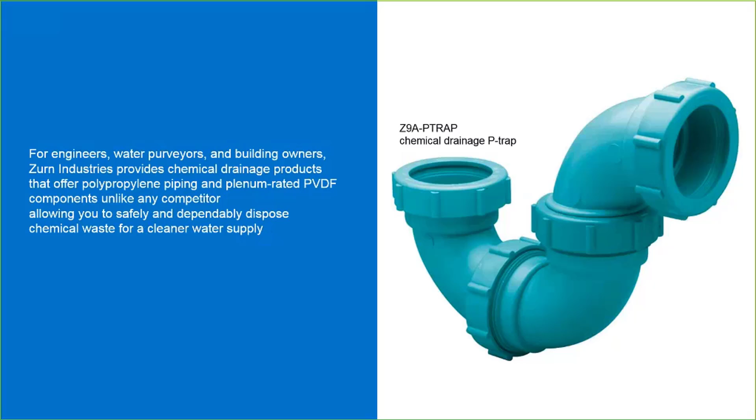For our engineers and building owners, Zurn does provide a chemical drainage product offering of both polypropylene and PVDF for pipe and fittings. Unlike our competitors, however, we have one fitting for two different mechanical joining systems and one fusion system, so a combination fitting that helps reduce inventory carrying levels and also allows for additional job site flexibility, providing reliable leak-free joints for the purpose of disposing of chemical waste and keeping the water supply safe.

If we look at the voice of the customers for the industries we serve, the owner needs a dependable, durable, low cost of ownership, lower cost to install and maintain for the life of the building that reduces downtime and is easy to maintain. The engineer needs a dependable product that meets codes and compliance issues and is also durable, lasts the life of the building, and also provides a cost-effective solution.

Whereas the contractor is going to look for something that's easy to install, easy to maintain, assembled, received on site in an easy fashion, and saves them labor and handling on the job site.

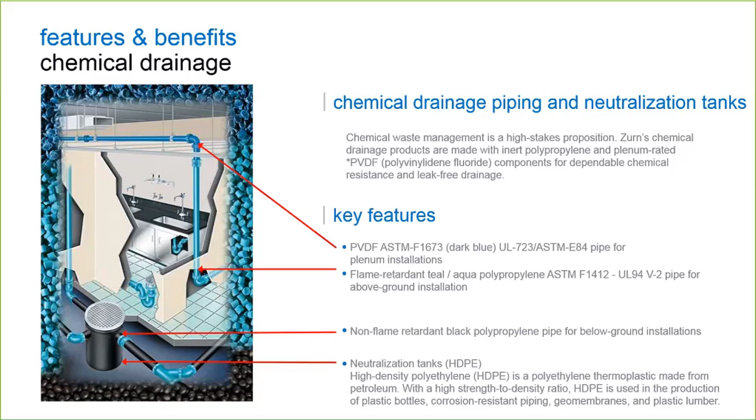The tanks are constructed of HDPE, which is high-density polyethylene, also a thermoplastic in the polyolefin family, and very similar in chemical resistance to polypropylene. Most tanks, barrels, containers are made out of HDPE. Important note there is that you cannot fuse or bond to that by heat. That is a mechanical joint only.

Again, when you're looking at the pipe options, we offer 3. Your non-flame or black, which is in your ground, shown in the middle section there, can be 10-foot or 20-foot lengths. We stock both of those, and the idea with the 20-foot length is that it will reduce a coupling and therefore labor and get you to those longer runs that are typically featured under the ground. That is 1.5 through 6-inch sizes.

The flame retardant polypropylene, 1.5 through 6-inch in diameter, comes standard in 10-foot lengths. And then the PVDF is 1.5 through 4-inch. Most of that is above ground in plenums, and 4-inch is more than ample size to accommodate that requirement. And those are also 10-foot lengths.

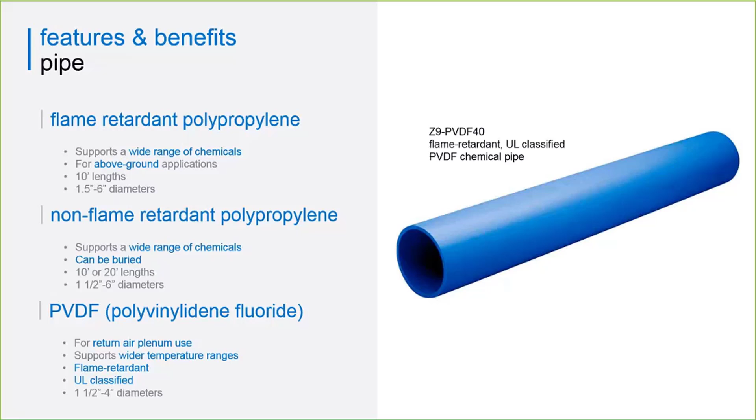So that PVDF pipe does carry a UL 723 E84 flame and smoke resistant rating, whereas the flame retardant is rated to UL 94 V2, and of course the black or non-flame retardant is not rated, which is for use underground.

Let's talk about the joining methods now. The value add that Zurn offers is one fitting can be used for any of the three joining systems shown here. So whether it's the traditional grooved mechanical connection, the labor-saving stab lock mechanical connection, or the fusion lock coil fusion heat joining method, the same fitting can be used, and it's just a different seal or insert that goes between the fitting and the pipe to make those various different type fitting connections.

So the question is, which one do I use? I can go through the typical installation there, but before I do, one notably missing joining method, which is typical for plastic pipe, is a glue or a solvent joint. If you've ever installed ABS or PVC, you know there's the purple primer and then the glue, the solvent weld that you put into the fitting with the dabber,

and then the connection makes a chemical bond. Well, if you recall the title of our training today, it is chemical piping. So it's chemically resistant and therefore not able to be glued or joined by a chemical process as other piping systems are. That's why it's used for draining chemical waste.

So let's talk about the mechanical joining system here first. Traditional grooving: there is a grooving tool that puts a groove into the pipe where the polyethylene seal will snap into place, and then tightening of the nut compresses that seal and creates your leak-free joint. That was our initial mechanical offering.

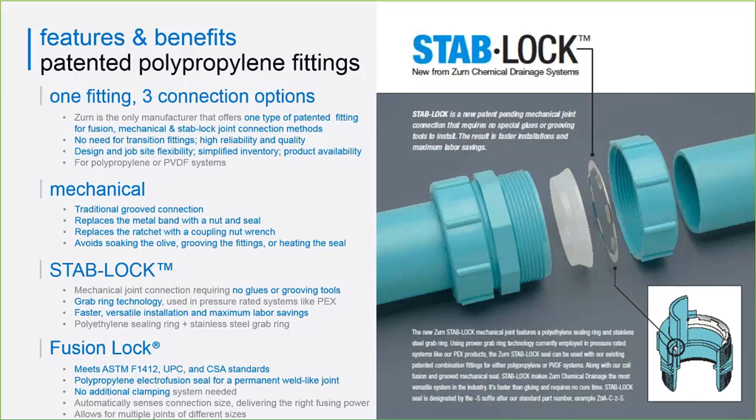The question would be, which one do I use, or what dictates the type of joining system? I would say most of it is either engineering preference or local codes. Typically, if it's below ground, it's going to be fused, and if it's above ground or accessible, it would be mechanical. You can have mechanical below or fused above, but it's probably an 80-20 rule or higher that your fusion is below ground and your mechanical is above ground if you've got access to it.

We have floor drains as well. In a bigger commercial or industrial application where you might be working with chemicals, say in a food processing plant, you need to capture material that might be spilled onto the floors, and you want to use a chemical resistant floor drain. We do offer stainless steel drains, but in keeping with the polypropylene or PVDF, we also have those bodies here.

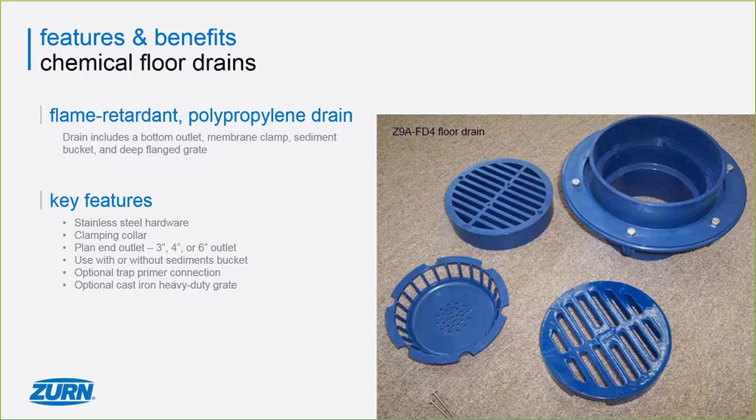The bottom grate is ARE coated, which stands for acid resistant epoxy coated heavy duty cast iron grate. If you're going to have fork trucks of heavy loading going over it, you'll want the cast grate versus the plastic grate. It also comes with a trap primer connection option. This one also has a clamping collar. Any hardware you use is also stainless steel when we're talking about chemical waste systems.

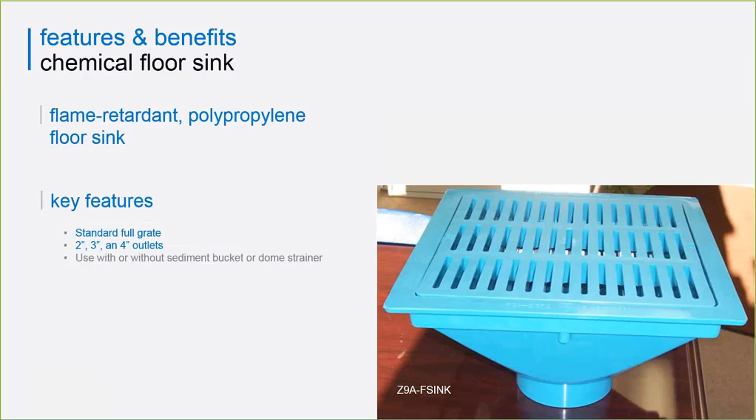Just another floor sink we offer. This one is in polypropylene, and it comes with a full grate, half grate, or quarter grate. Again, condensate is typically acidic, so if you've got any of those machines dispensing that, it'd be a great option to go with one of these type drains.

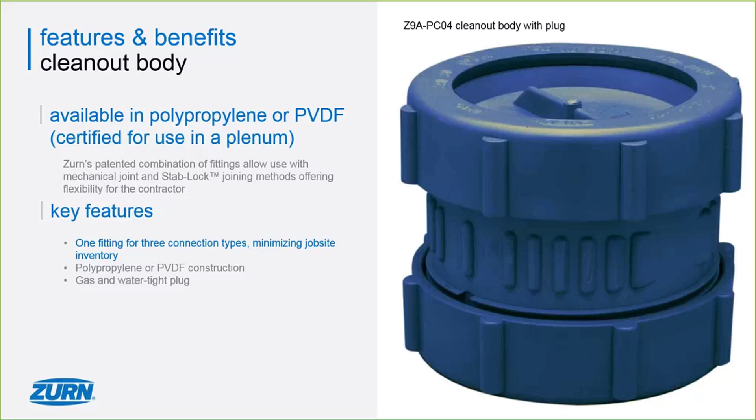So where does all the waste go once it is transported with the system, whether it's polypro or PVDF? Down to the neutralization tank. The neutralization tanks range from 5-gallon to 3,000-gallon. We also have a point of use fixed cartridge system I'll talk about in a few slides. But the main purpose here is to collect all that waste and treat it before it is sent out to the municipal sewer. So again, these are filled with limestone chips. We do have some specifications on those coming up as well.

I mentioned, I think earlier, that the joining method to a tank has to be mechanical. Because the tanks and the piping used here are high-density polyethylene, polyethylene and polypropylene will not bond to each other during a fusion bond. And so you would either need to use the mechanical groove, the stab lock, or a threaded connection, male or female, to make the connection to the tank.

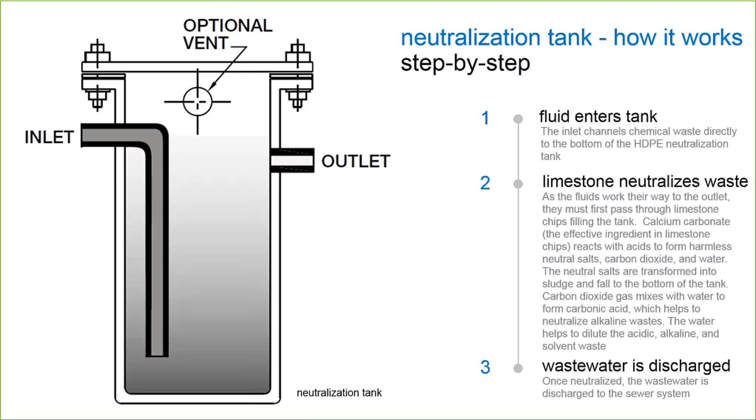So if we take a break here to do a test your knowledge on how well you're paying attention, place the following in the correct order. A, fluid passes through limestone chips to neutralize alkaline waste. B, wastewater is discharged to the sewer system. C, the inlet channels chemical waste directly to the bottom of the HDPE tank.

Pretty simple process here. The correct order is C. Waste enters the tank, channeled to the bottom. A, the fluid passes through the limestone, and then B, finally, the wastewater is discharged to the sewer system.

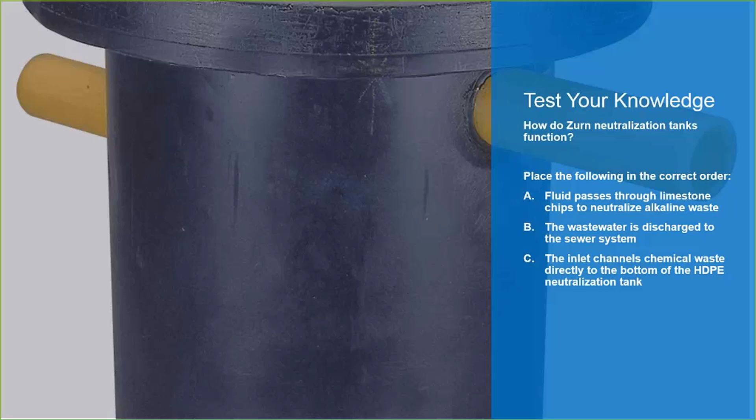So here we go with the limestone. We do sell those in 50-pound bags. There is a chart in the catalog and also shown here how many pounds of limestone typically fit within a tank. You can see 50 pounds in a 5-gallon. In a 500-gallon would be 5,000 pounds, and everything in between. Again, the limestone is 1 to 3 inches in size. You don't want it too small or pea gravel because you won't get the water to flow through it. And if it's too large, it doesn't have enough surface area to do the neutralization. So keep it within the 1 to 3 inch size.

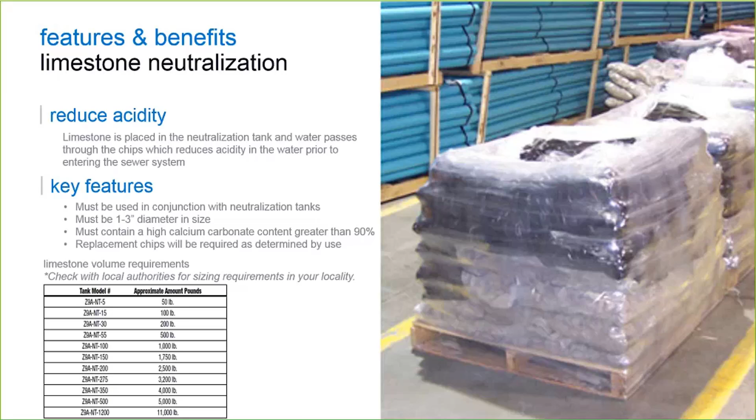And then the other strict requirement is that there must be a 90% or greater calcium carbonate content within that limestone to be able to create that neutralization. And then replacement chips are required, so the rock is used up and does react. And I'll talk to you about how you know that here in a slide or two coming up. So again, we've got a pallet shown there.

One other feature of our system is we offer the PHIX cartridge. So this is more of a point of use. So if you imagine this being underneath the lavatory outlet, kind of like a garbage disposer in your home, it's going to treat the waste immediately upon entering the sink. The nice thing about this is that if it's a retrofit or a facility that hadn't been purposed for a laboratory, it can be retrofitted fairly easily by use of the PHIX cartridge.

And again, just as the neutralization tank filters the waste through the bottom so that it filters up through the media, same mechanical process here with the PHIX cartridge. However, we don't have huge amounts of limestone. We've got a very different proprietary blend here of material that does that same neutralization on a much smaller scale. It actually does last longer and is more effective, but it does cost a lot more.

So you would ask, why don't we use this media in our big tanks? And the reason is cost, and this sizing here also maxes out at 10 gallons per minute. So if you've got a typical faucet aerator that would be used in a laboratory, say of 2.2 gallons per minute, you could actually hook up 2 waste lines to 1 cartridge.

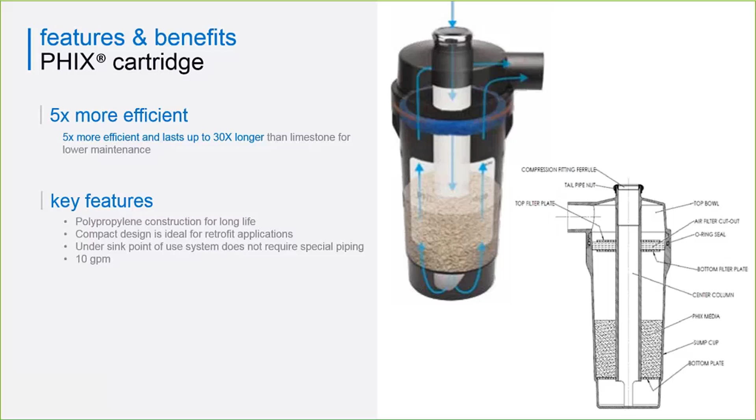Typically, to be safe, you're going to go one per each outlet. But again, it can be used also in new construction. It's ideal for retrofit, but there's no reason that it cannot be used in new construction too. Again, depending on the facility, the engineer is going to specify either a complete system with a neutralization central unit or point-of-use PHIX cartridges shown.

So how do you know that the waste you're expelling is to code? We do offer a pH monitoring system. So what that installation would look like is after your tank, let's say you've got a 300 or 500 gallon neutralization tank, you would feed into a sampling tank. So a 5-gallon tank that would have a pH probe in it, and that is going to record the pH of your effluent. These can be set to a high and low alarm, and should they go off, know that you'll need some maintenance of your tank.

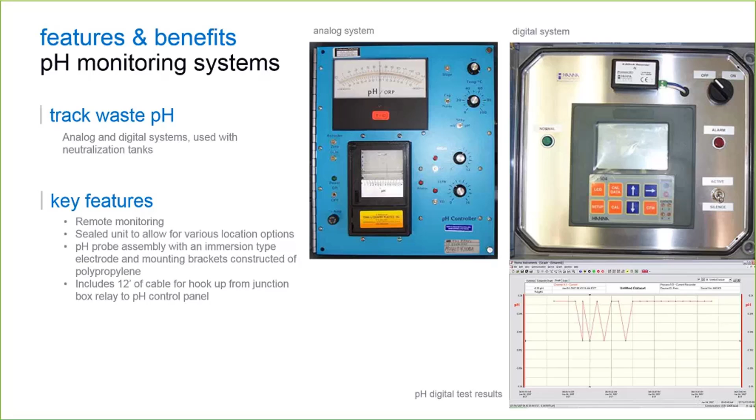So again, you've got to be careful on the discharge side not to have any waste that's too acidic or too basic, which then can corrode the municipal piping. And so, depending on various codes, there are requirements of a high and a low pH, and these recorders are going to help you maintain compliance and also give you an indication of when to change your limestone.

So if you look at the overall features and benefits, the question is, do you need a dependable method for disposing of chemical waste? If the answer is yes, then we've got a solution for you. Again, a multi-tiered, cost-effective solution, pipe options, and then different joining methods to suit your needs. The fittings do provide you leak-free, quick installation, and a system that's good for the life of the building.

And the next question is, do you want to be ensured your piping is chemically resistant? Certainly there are alternate piping systems out there. Some of them are more susceptible to various chemicals. And if it's a building that might be a lab today, a more in-depth one tomorrow, and you really aren't able to change piping, you want to go with the best solution and offer the best chemical resistance. Again, if it's a building that's already piped, typically you don't repipe it. You could go with the PHIX cartridge system.

Again, we offer the various pipe fittings, connections, the cleanouts, the tanks, and the monitoring system to really provide a complete solution. So our applications engineering team can help guide from sizing. You're going to have a minimum retention time within that tank to ensure that the waste has been treated, and then monitor it.

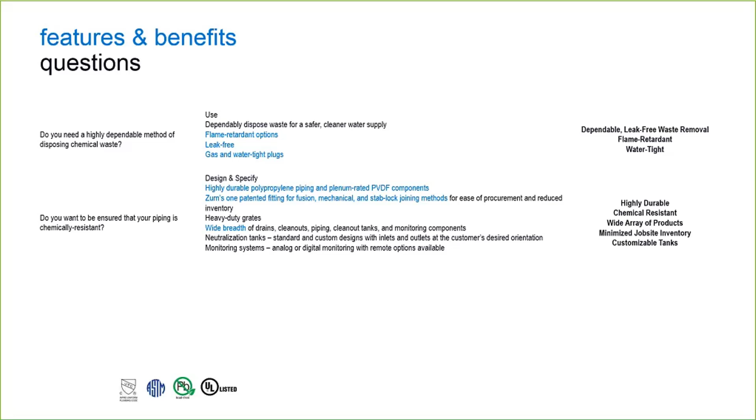So we've got another question here: what are the top 3 benefits of the Zurn drain? A, dependable leak-free waste removal. B, highly durable chemical resistance. C, patented stab lock fusion or mechanical joining method. Or D, customizable neutralization tank.

All right, let's go ahead over the answer here. If we look at the drainage system, I would say that your top 3 are going to be A, B, and D, while C gives you the optional joining methods. Your critical components are going to be your leak-free handling of waste, chemical resistance, and then that system treatment at the end for your neutralization tank.

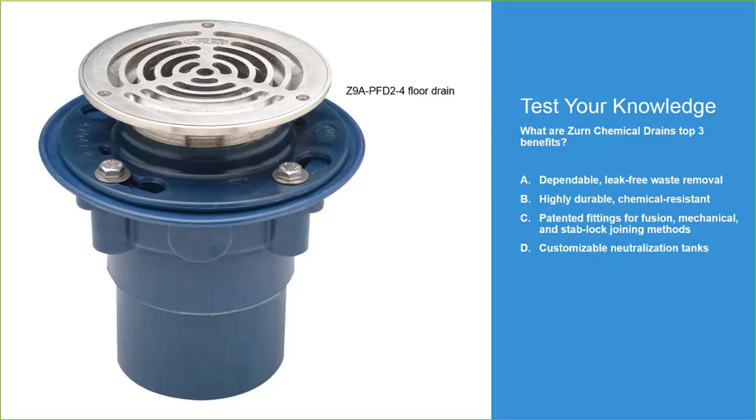So just a real quick summary for the various customers we serve. The building owner: a dependable leak-free waste removal system that's watertight, durable, chemical resistant for the life of the building. From the engineer standpoint, a wide variety of chemical resistant materials to choose from to optimize the cost of the system. Customizable tanks depending on the gallons per minute of effluent. And then also the chemical resistance, knowing that your system is going to be in place for the life of the building.

From a contractor standpoint, you've got your leak-free joints, your fast installation with the stab lock, and with the various joining methods available with the same fitting, you've got your job site flexibility, minimizing any type of duplicate inventory you need to carry on site.